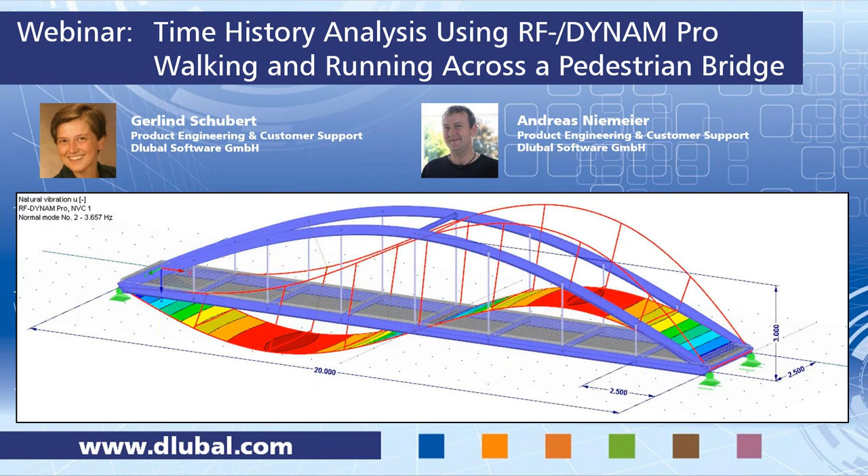This is the model that we look at today. It's an arch bridge, and the persons we simulate are walking in the center along the bridge. So we simulate an excitation which is changing in time, but also changing in position. That's the important bit today.

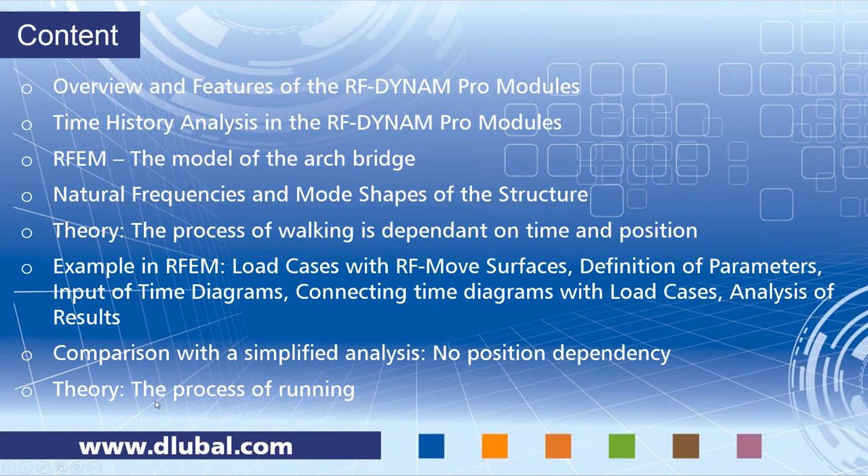Last, I will explain the theory of running. So I will show you all the formulas you need to simulate running, but we don't do this as an example again in RFEM because the input would be very similar. That's why I just show you the formulas and how you can do this. So this is the content, now you know what to expect, and we start with the overview of the modules.

So we have 3 dynamic modules in RFEM. This is the same in RStab. So we have 2 program families, RFEM and RStab. Dynamic modules exist in both, and they are very similar in both. In RStab, you can only consider members, and in RFEM, you can also consider surfaces and solids. So this is the main difference between them, but the dynamics modules themselves are very similar.

So we have the module RF-Dynam Pro Natural Vibrations.

Which you can use to analyze frequencies and mode shapes for member surfaces and solid models. You can directly import the masses from load cases, and you can combine these mass cases in mass combinations.

You can also import stiffness modifications, for example to consider the pre-stress of cables, or you can deactivate some members. You could consider the stiffness from RF concrete, and so on. So this is considered as initial conditions.

So the whole dynamic module at the moment is based on linear calculations. We have obviously several eigenvalue solvers available and everything you kind of expect from a modal analysis, so you get modal masses, effective modal masses, and modal mass factors, and so on.

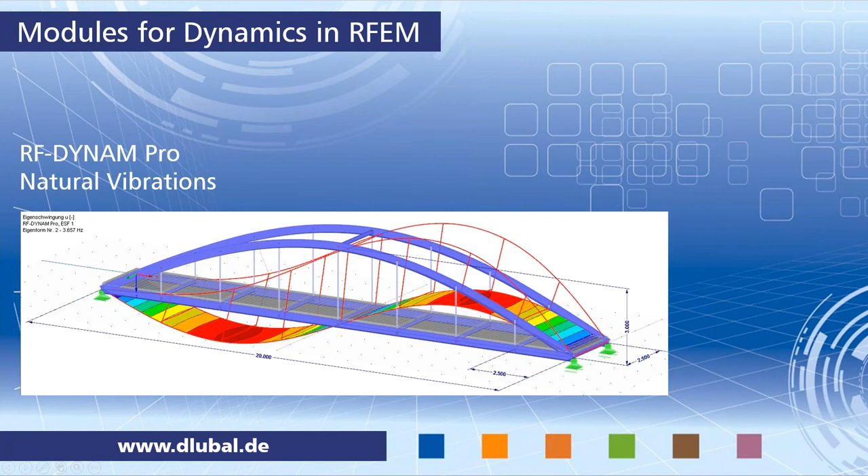Then we have the module RF-Dynam Pro forced vibrations, which is based on the natural vibrations, so you obviously need the natural vibrations as a basis. This module, forced vibrations, contains both the time history analysis, that's what we want to look at today, and the multimodal and multi-point response spectra analysis.

So today we consider only the time history analysis, and I'm also concentrating here on the introduction only on this one. The response spectra analysis is to perform an earthquake analysis.

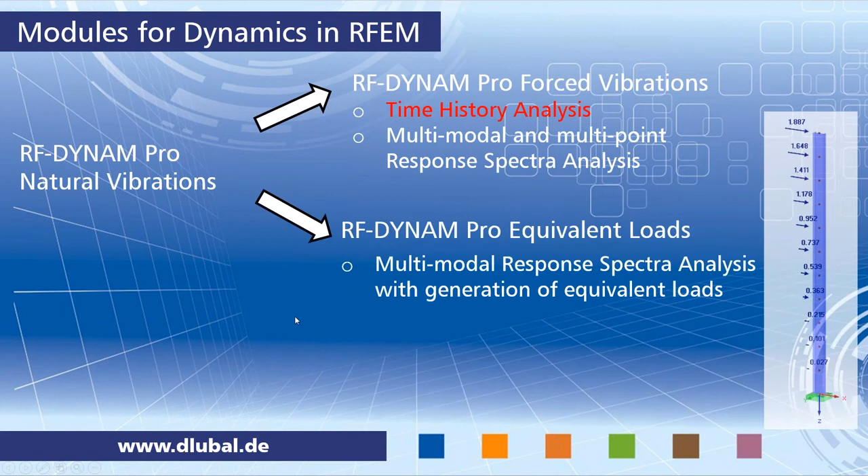And then we have the module RF-Dynam Pro equivalent loads. This contains a multimodal response spectra analysis, so it's again the same, but here you get equivalent loads calculated and exported into load cases, which you can use then in RFEM, like in this little example here.

So I don't go into detail on this equivalent load module. There is another webinar available which I did earlier, about a natural vibration analysis and equivalent load analysis of a framework. You can just have a look on our website and see previous webinars, download them or watch them directly as a video, as is possible with all of the webinars we did earlier.

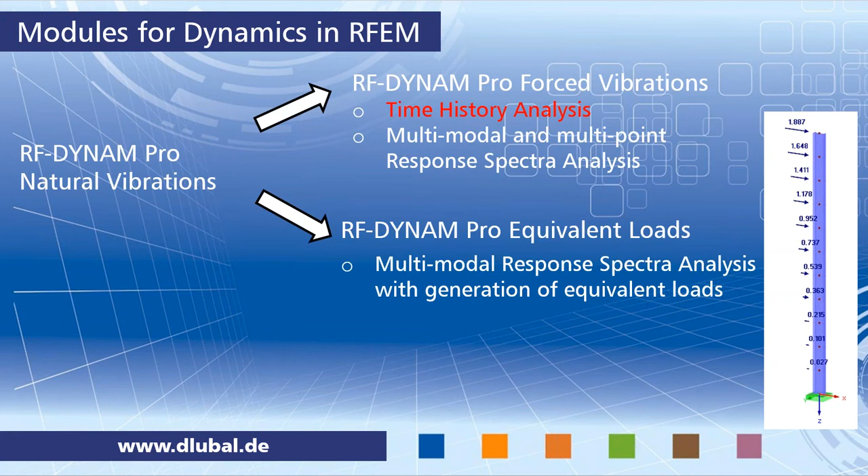So as I said, we will have a detailed look into the forced vibrations, into the time history analysis. So we have the direct integration implemented.

So we use the implicit Newmark solver, and here also you have different Newmark solvers available in the literature. We use the average acceleration method, so you could have a look in the literature for further details. For example, Wilson's Structural Dynamics is just one book I can mention, but there are many good books available about structural dynamics.

Very important for the Newmark solver is to have a small time step. It needs to be small enough to get accurate results. I'll come back to this point later on and give some recommendations for the time step.

We have the structural damping implemented, so you can choose between the Rayleigh coefficients and the Lehr's damping, and you can enter them vice versa. This is converted internally, so you can choose whatever you prefer.

We present the results in a time course monitor and also in result tables. I showed you the time course monitor already, and we will see it also in the example again. You can export results from single time steps, and you can also export result combinations, which is then an envelope over time.

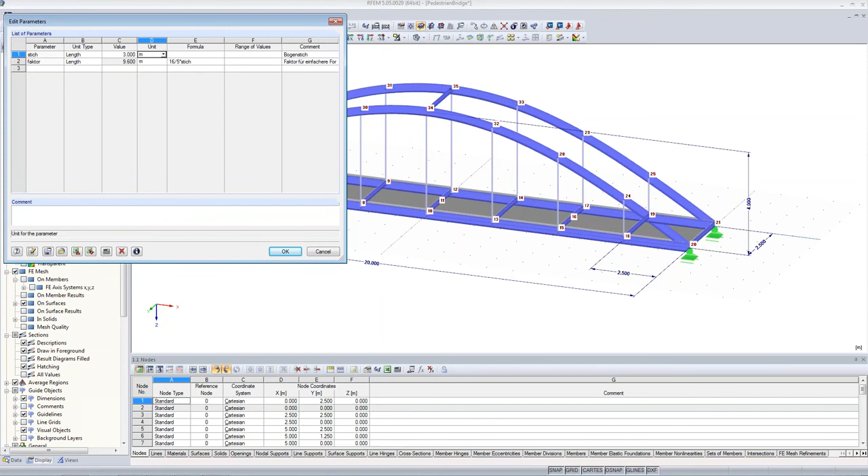I want to undo this, so this is as it was originally. We will use parameters quite often today, and I used them already in the model.

I don't want to go too much in detail here. I defined a thin surface, which is just a thin concrete surface, and this is just a simplified model. Usually you would define an orthotropic surface here, but I need the surface to define my moving loads later on with the add-on module RF Move Surface, and that is why I defined a surface.

There's also a webinar available about how exactly this bridge was modeled and how the parameters were defined, called Parametric Modeling of an Arch Bridge, available on our website. I will show you this at the end of the webinar, how you can access the webinars and download them.

So this is all about the model. We go into RFEM already. Here we go, RF-Dynam Pro, dynamic analysis.

There are several ways to open add-on modules. You can also open them from here, dynamic, and then RF-Dynam Pro. Here you see again the separation into the 3 add-on modules: natural vibration, forced vibrations, and equivalent loads.

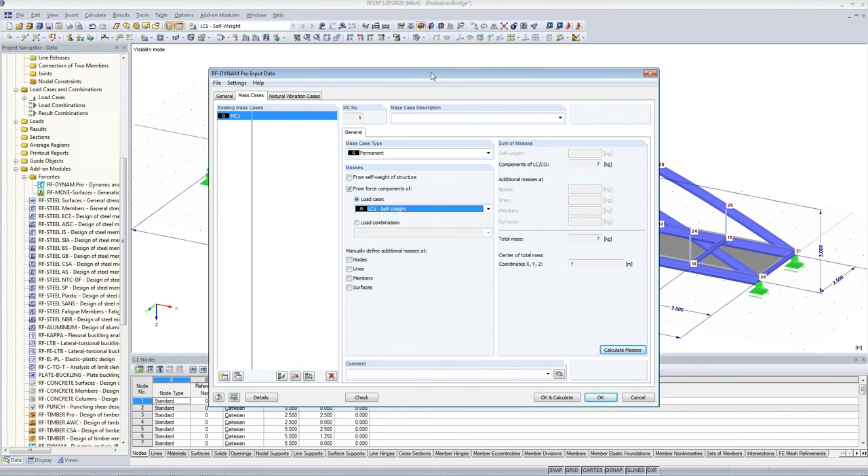This includes the self-weight of the bridge and another 4 kilonewton per square meter for further footway structure that is not modeled itself, that I just apply as a load. So I import here the loads of the self-weight load case. This is important - clear this checkbox here, otherwise you would double the self-weight.

You can calculate the masses internally if you want. If the model is too big, I don't really recommend this, but you can. This is for double checking the masses you actually import here.

You could also define nodal, line, and member masses, surface masses, if you need, so you can define them manually to add, for example, something which is not modeled itself or not included in a load case. You can add this manually here, just as an option. So you have several options already here.

Then we have the natural vibration cases where we import our mass case and where I want to have a look at the first 10 eigenvalues. I apply a diagonal matrix which only considers the masses in translational directions, and I use the Lanczos solver, which is recommendable for this size of structure. It's not too big, so it's a quite quick, fast solver here.

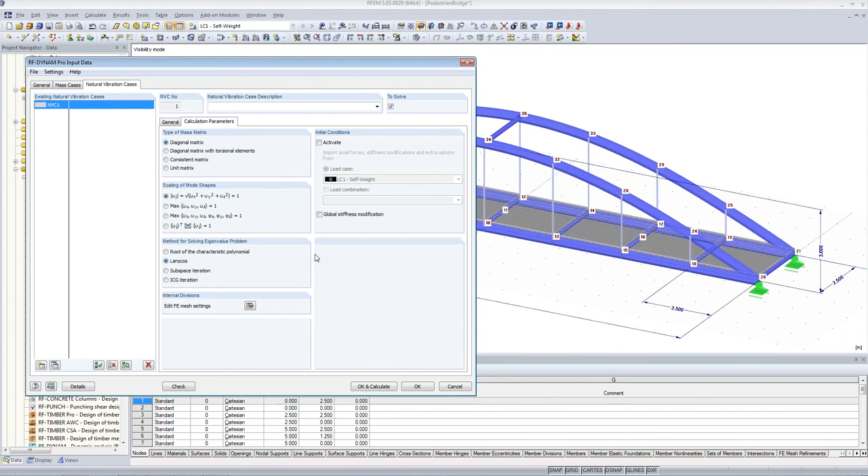Here's the part where you can import the stiffness modifications, as I said in the introduction. But I go more into detail on these natural vibration cases in the other webinar I mentioned already, and I'll show you at the end that you can find it and watch it afterwards.

So here we go, I just want to calculate the natural frequencies first of all.

So we have the dynamic results available in the main program RFEM. You reach them with this button, table 5, dynamic analysis, and you have several drop downs here. At the moment, we have just one natural vibration case, so that's why the drop down doesn't contain anything else - we will see this increasing later on.

We can select the mode shapes in this drop down, or we can just go through the table and look at the mode shapes in the graphic. This is updating automatically. So let's have a look at the first one - this is just the arc going to the side.

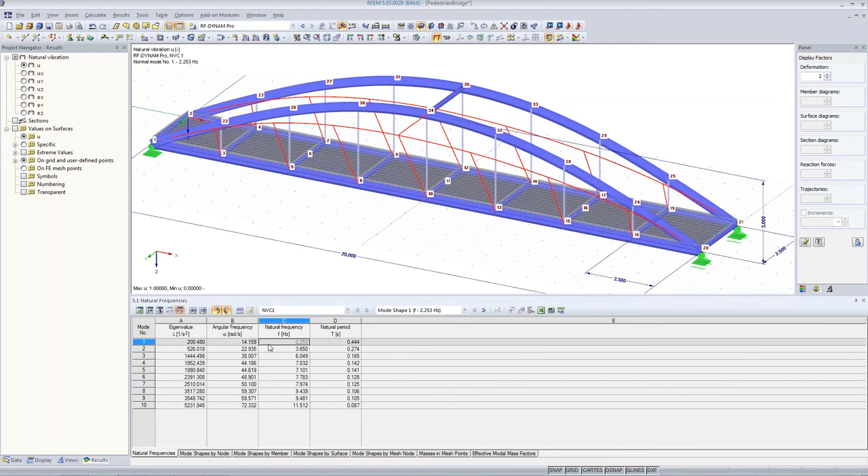And this one is relevant for us - this is the second mode shape with 3.65 Hertz. This is the most relevant shape for us today, because this is the shape of the footway.

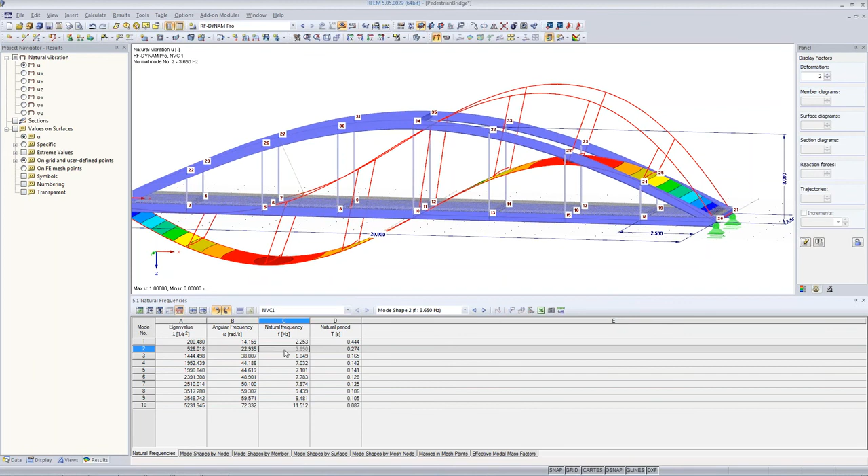What we learn also from this mode shape is that our critical load points are in the quarter points of the bridge, not in the middle. And the frequency 3.65 Hertz is below 5 Hertz, which means we have to consider the dynamics and study this. As you all know, pedestrians are walking with approximately 2.5 Hertz, so this is relevant today.

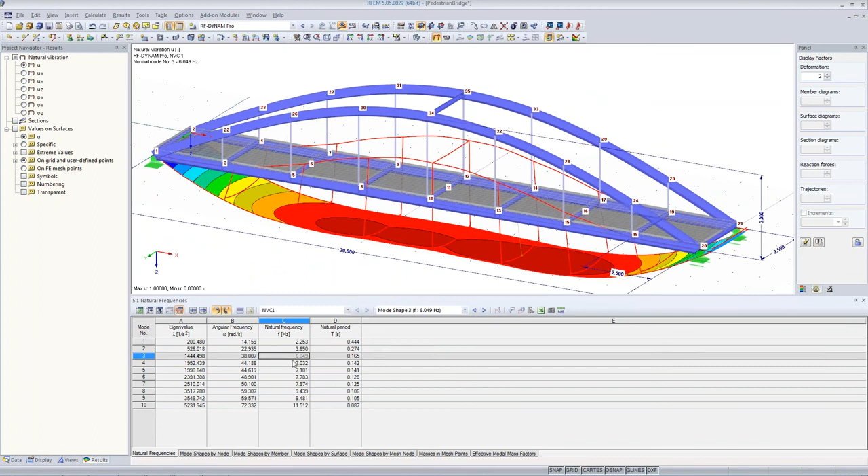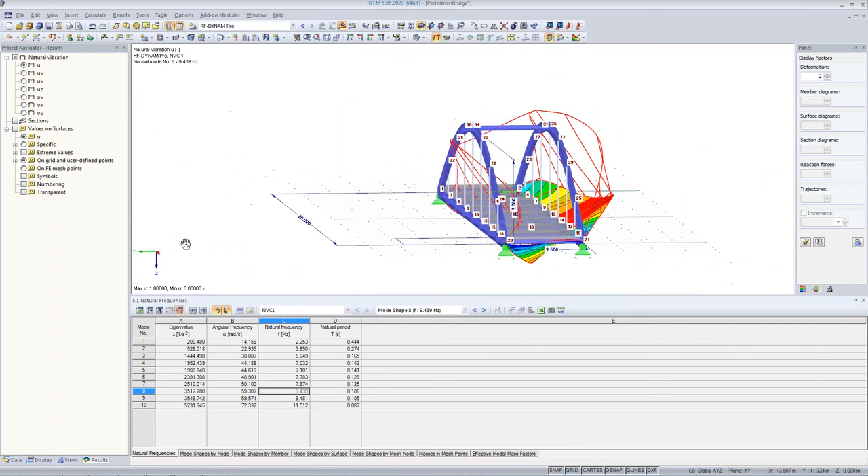We can have a look at the other mode shapes just to complete this. Here the footway is going down, here we have a crossing arc, and here the whole footway is twisting. This is the second mode shape of the arc, and the third mode shape of the footway, drifting away completely here. And this one, the last one I want to show you, is this one. Quite interesting mode shapes, but for us the most important mode shape is this one.

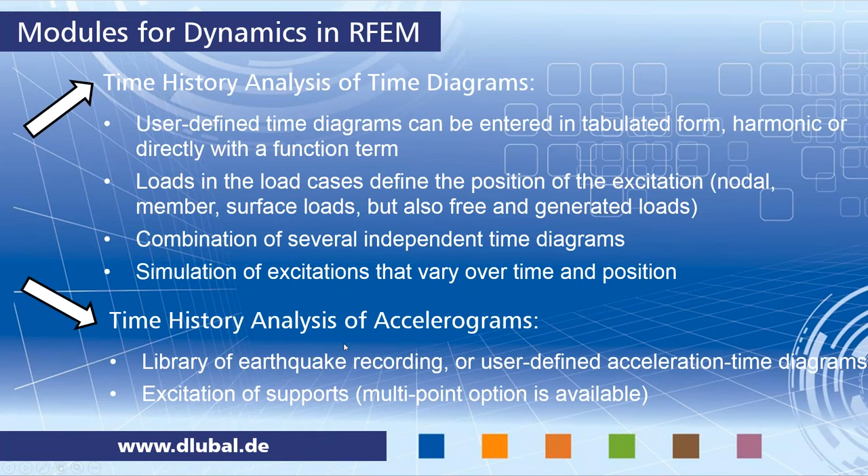So we go back to the presentation, and I want to come to the details of walking. I start with the vertical excitation, and this is the only one we want to model in our example today, because the horizontal excitation is very similar, and you will see how much effort it actually is to enter all these functions.

I'll show you this formula again when we enter it into RFEM so that you can really follow it. A walking person usually walks with a step frequency between 1.7 and 2.3 Hertz, and with step lengths of 60 centimeters to 1 meter. So this is usually the case, and you have to choose whatever is the worst case for your structure.

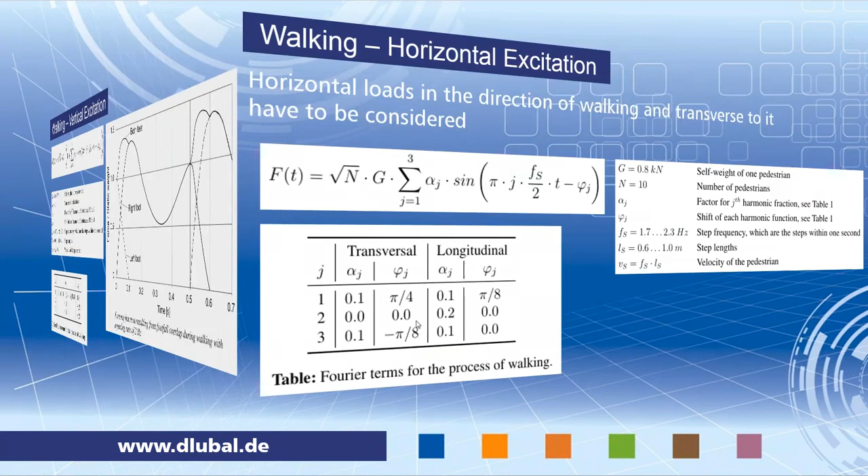The next point is walking. Walking also leads to some horizontal excitation, which comes from the push of the foot in the direction of walking, and from the movement of the upper part of the body transverse to the direction of walking. This is much smaller than the vertical load, and it only considers half of the step frequency, because this is only happening either in the left or the right direction.

So I just want to show you this formula. It's quite similar, a sinus function as well, consisting of 3 Fourier terms, and you have the weight of the pedestrian. This is the number of persons, I'll come back to this later on. We had this in the formula for the vertical excitation as well. I'll explain later how this is calculated, or what kind of assumption you have to make here.

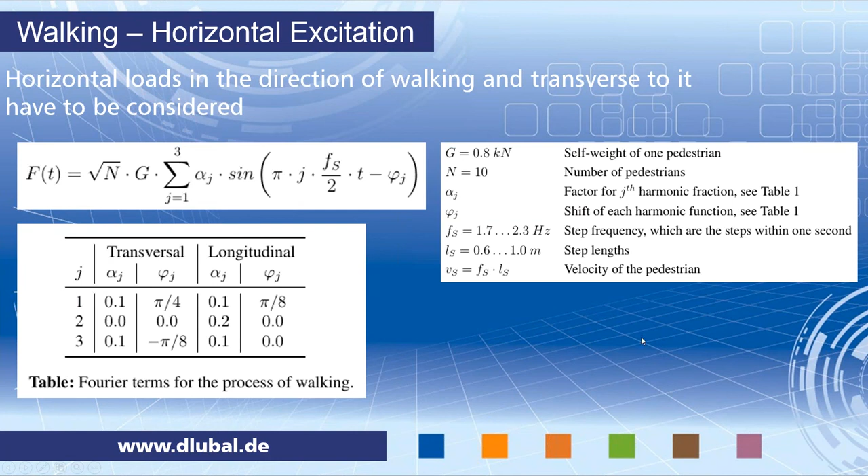We don't consider the horizontal excitation in our example today, but this might be quite important, and you have to consider this if your bridge is quite soft in the horizontal direction. So this might be important, but it's too much for this one hour webinar today, that's why I excluded it from today's example.

As I said, we come back to the number of persons. It's not that multiple persons on a bridge increase the load by the same factor, because these persons are not walking synchronously, they are walking randomly. That's why you don't multiply by 10 just because you have 10 persons on the bridge.

That's why in the formula you have the square root of the number of persons. Then you have to think about how many persons are actually on the bridge. If there are too many persons, you don't consider a dynamic problem anymore. If you think about a stream of pedestrians or a crowd, this is not dynamic - these persons are not walking or running anymore, they are moving slowly, statically.

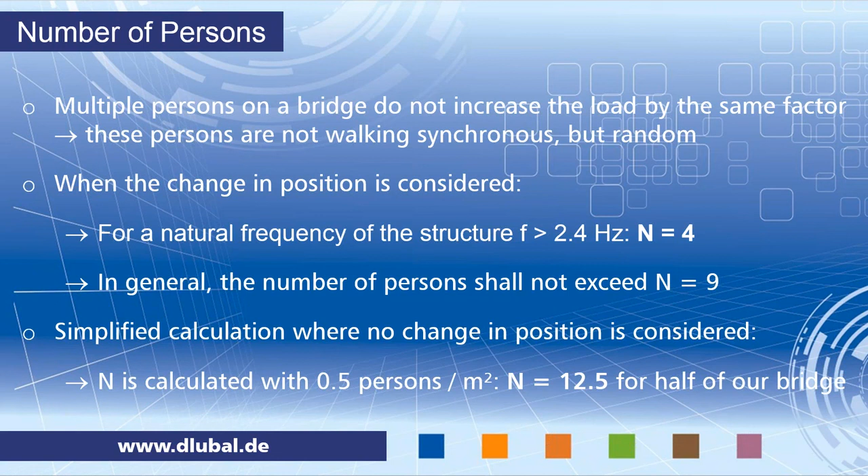We want to consider the dynamic case, and you find several assumptions in different standards. For example, the Eurocode suggests 10 to 15 persons, and it also depends on whether you consider the change in position or not.

So we start today with the detailed implementation. We study the change in position, and the recommendation is: if your natural frequency of the structure is greater than 2.4 hertz, which is the case for us, you have to consider 4 persons walking along the bridge. In general, the number of persons shall not exceed 9.

When you do not consider the change in position, so when you simplify the calculation, you need to consider more persons. You should consider half a person per square meter, which for our whole bridge would mean we have to consider 25 persons.

But that's not realistic in our case, because our relevant mode shape, as we have just seen, is the second mode shape. So our critical load points are the quarter points, and that's why it's more realistic in our case to consider only half of the bridge. So in the case where no change in position is considered, I would assume 12.5 persons being on the bridge.

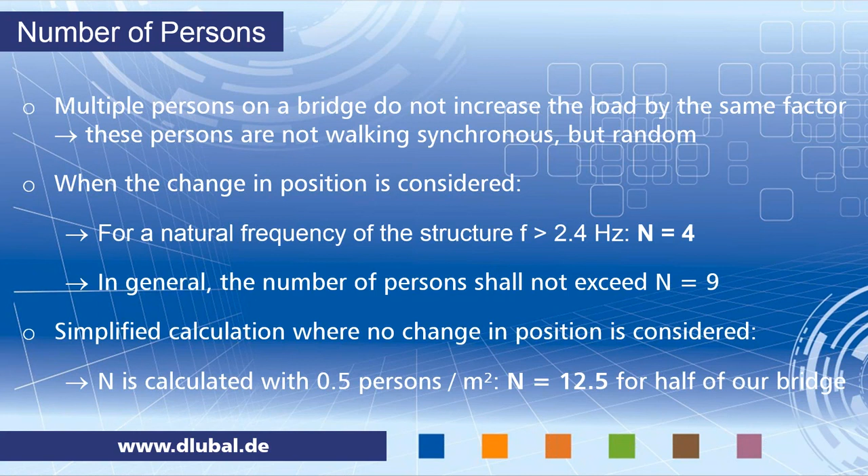Then I already said that the choice of time step is very important. This is a compromise between accuracy of the results versus calculation time - the smaller the time step, the longer it calculates, but the more accurate the results are.

There are some recommendations available: you should choose the largest natural frequency of your system that is relevant for the system response, and apply this formula to get a delta t. In our case, the relevant frequency of our system is 3.6 Hertz, and this formula leads to 0.014 seconds.

The second relevant factor is the largest frequency of the excitation function - not only the structure is important, but also the excitation function. Our excitation function's largest frequency is 6 Hertz, so we end up with 0.0083 seconds, which is already a bit less.

I did a convergence study in advance to this webinar, studying larger and smaller time steps, and I ended up with 0.01 seconds being good enough and leading to accurate results.

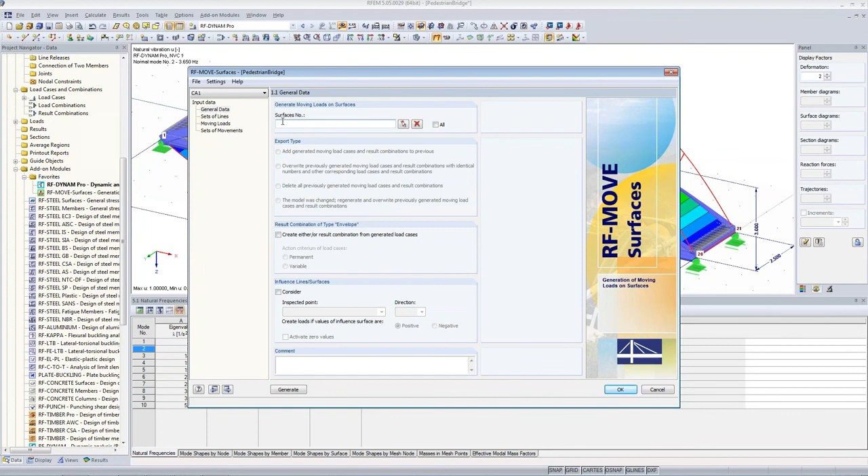Okay, so we want to have loads on all of our surfaces, so I apply the checkbox 'all surfaces' here. And this is all I have to do in the general data.

The sets of lines - we have these pictures here that help us to understand what's going on. So I start with the right foot.

As I said early on, we will have a step length of 62.5 centimeters. This means that the right foot comes to the ground every 1.25 meters - that's the moving step, 1.25 meters. And I apply also an offset at the beginning and at the end.

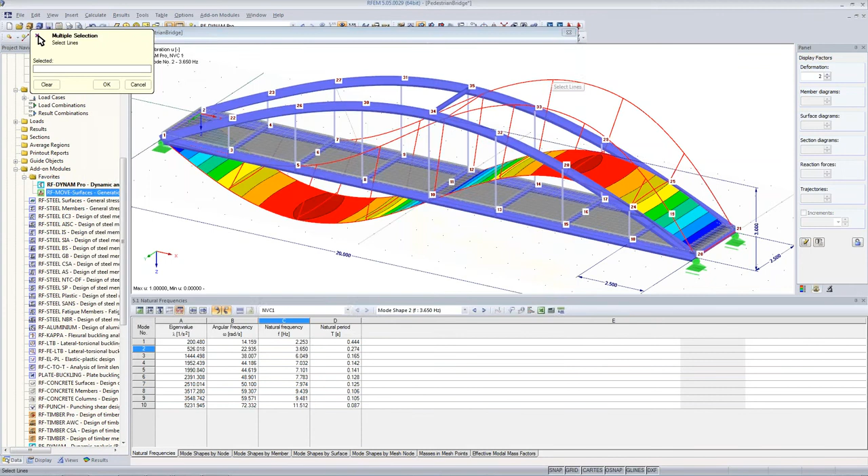Here I have to choose some lines, select those lines, and then define an eccentricity from there, to define how far away from this line my persons are walking. In my case, I want the persons walking in the center of the bridge, and I decided to have the feet 30 centimeters apart from each other.

This is something you could neglect, but I want to study this today. So I say that my right foot is 1.1 meter from these lines we've just selected, and I have to apply a minus here. This is something you have to try, it depends on the direction of your lines. My lines are going away from node 20, so that's why I apply a minus here. So this is the right foot.

I create a new set of lines, which I call left foot, with the same moving step of 1.25 meters. Now I have a larger offset, this is something you have to try out. This is just because my left foot is 1 time less on the bridge than my right foot, well, it's just through the process of walking. So minus 1.4, as I said, 30 centimeters apart.

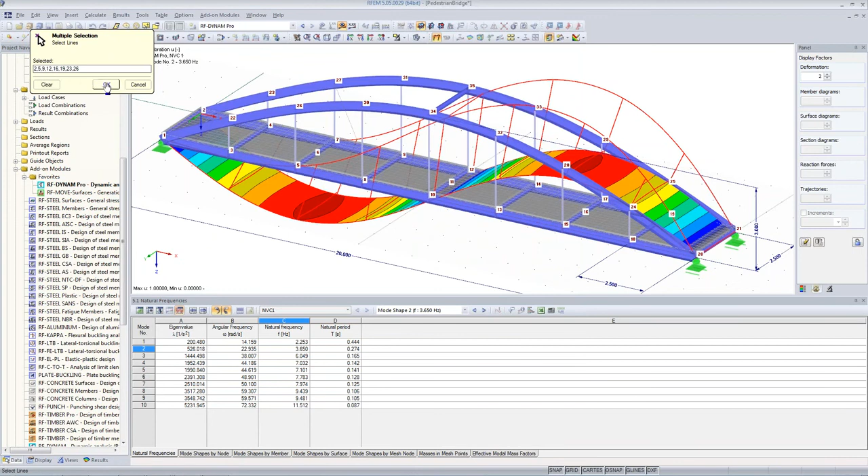So the next one is moving loads. We have both feet, so this is just the load itself we define here, both feet, which is a concentrated force. I want to just define 1 kilonewton here. That is because I want to define all the multipliers and the actual size of my force in the module RF-Dynam Pro, because in RF-Dynam Pro I can use parameters, and this makes it more flexible at the end. So this way I've decided for a 1 kilonewton here, just unity, and I apply all the multipliers later on in RF-Dynam Pro.

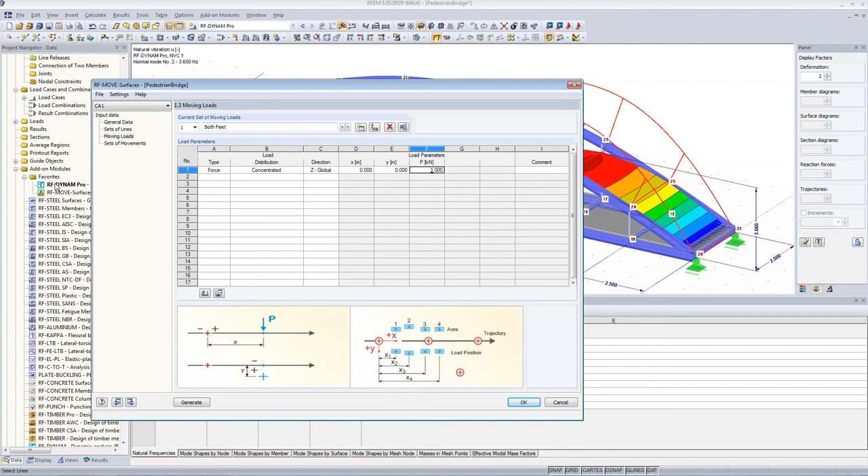So this depends on you. You could also define the weight of the pedestrian here, and then you would not define it in RF-Dynam Pro. It's just a multiplication.

Okay, and then we define a set of movement where we define the right foot. I just choose the right foot and my load we've just defined. I want to have all these created load cases into the earthquake category - not because I'm studying earthquake, just because nothing else really fits. So I've chosen earthquake, and that's okay, so we know where it's coming from. It's a dynamic study we do here.

So I create another set of movement, which is the left foot, and again I choose the left foot, and here both, and that's earthquake. You see now that the current set creates 15 load cases, and altogether we will get 31 load cases. And now I click generate.

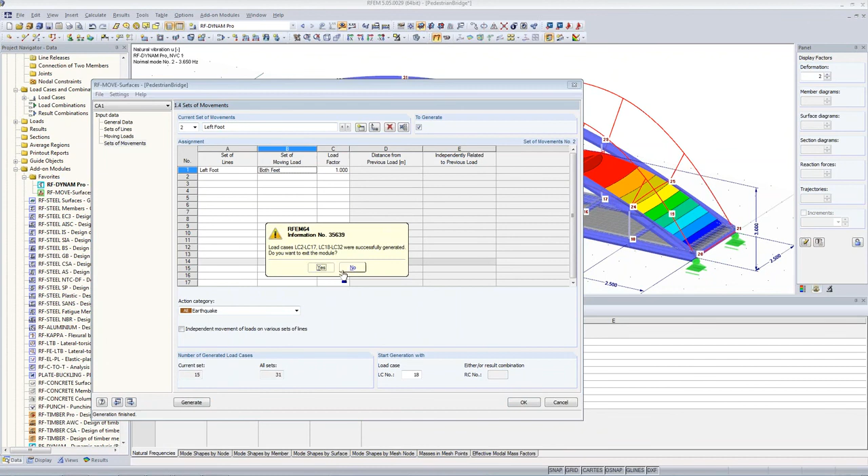And I want to exit the module, yes. And now I can show you what we did. We created all these load cases, and this is what I said, it's just a nice tool to make this a bit faster. So what we created is, when we have a look into Z direction - let me make these tables a bit smaller - and so we see our loads, yeah, here it's the 1 kilonewton.

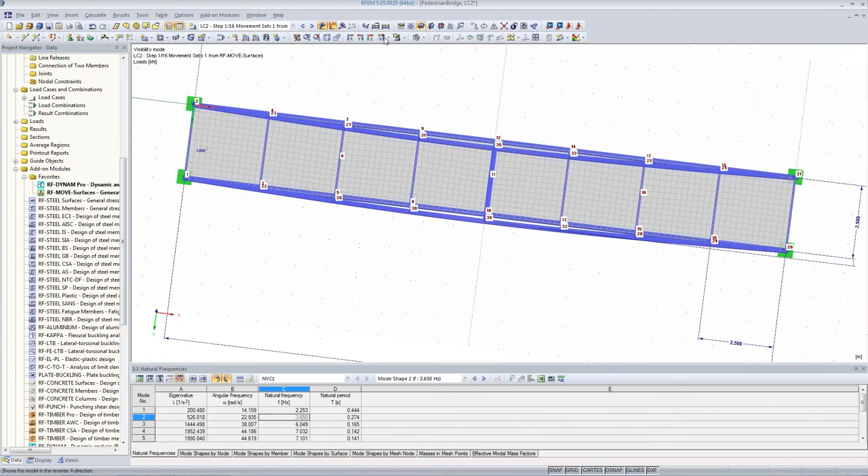So, and now this is the right foot moving along, and after that follows the left foot. We have to connect this then in the right order with our time diagrams. So, okay, that's us done with RF Move Surfaces. Now I want to define a few parameters that we need for the definition of our time diagrams.

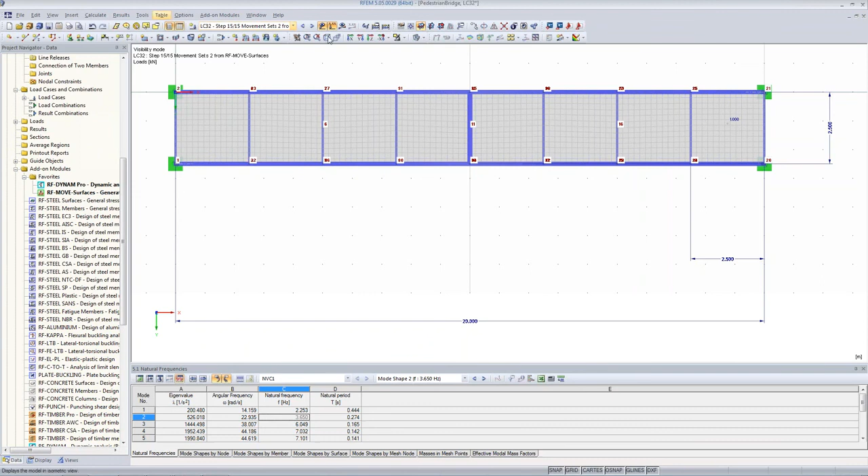So I go again into edit parameters, and I define here the parameter G, which is a force of 0.8 kilonewton - that's the self-weight of the person, which we have seen in the formulas, self-weight of person. And we have N, which are the number of persons, dimensionless. You have quite many different types of unit types available here. I've said earlier that we have to consider 4 persons when we consider the change in position, so we have to apply 4 persons, number of persons.

And then we have the step frequency, which is fs. There's no frequency unit available here, but it doesn't really matter in our case, so I just choose dimensionless, and we start with 2 Hertz. So we study a frequency of 2 Hertz, step frequency.

I just make a note here that this is actually in Hertz, so I don't forget. And this is all the parameters I want to define.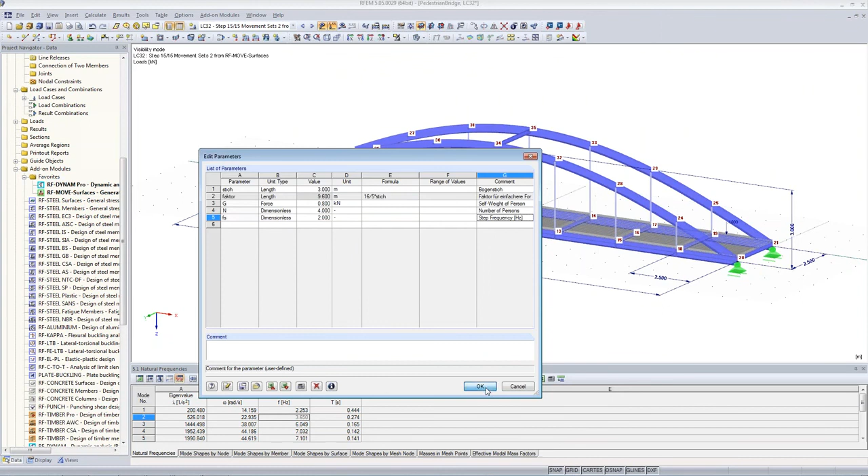Now I can go into RF-Dynam Pro, and we want to study time diagrams. So we activate the forced vibrations module and we activate the time diagrams. And now we have 2 more tabs here, the time diagrams and the dynamic load cases.

I'll show you the time diagrams. I said in the introduction that you can define it in tabulated form, so you can enter whatever you want, or you can import it from Excel. You can also define a function as periodic, where you have to provide the excitation function, the excitation frequency, and the shift. That's what we want to do today.

You can define a function directly here in the edit fields. So when I get started with the right foot in position 1, I have to enter now the formula, and I start with the sinus function itself and then apply all the multipliers. So it was 1 plus the first Fourier term, which starts with 0.4.

Then we have the sinus function multiplied with the sinus function of pi times fs and t. So t is the only parameter that you shouldn't use yourself, because t is used by Dynam Pro as the time. This is kind of a pre-used parameter, so you are not allowed to use it. When you use it, Dynam Pro cannot use it anymore, and then you end up with an error.

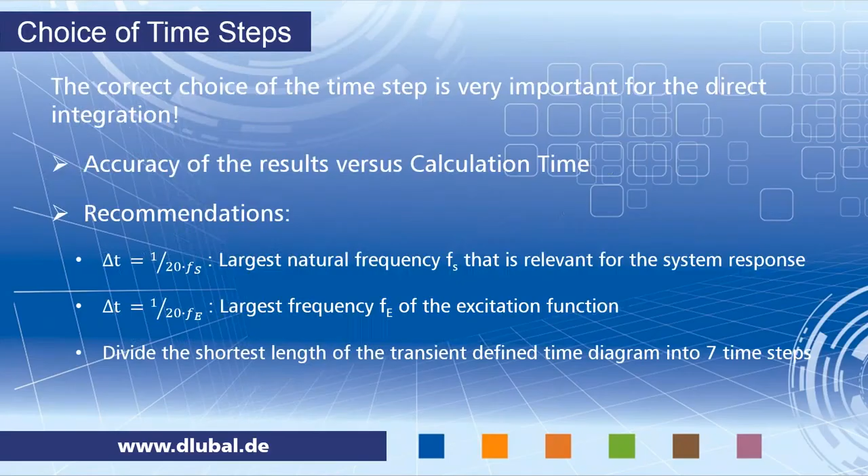So that looks already like what we have seen in the PowerPoint presentation. I go back to this and back to the walking vertical function we just applied. So what I did was the term in brackets: 1 plus, and then I have the 3 Fourier terms, which are the alpha values: 0.4, 0.1, and 0.1.

And then I have the 2 pi multiplied with j - j is just increasing with 1, 2, 3. And then we have the step frequency and the shift down here.

So now what's still missing is the square root over n and the self-weight of one pedestrian. Here we have to be a bit careful because the self-weight of the pedestrian we entered in kilonewton, but internally in RFEM everything is used in Newton.

So I have to divide my G by 1000 to really get my kilonewton. This is a bit tricky, you just have to be careful. So I have defined 0.8 kilonewton in the parameters, but internally now 800 newtons are used.

And then I have the square root over n multiplied, and this is the formula I'm using finally. I'm just looking up to 0.47 seconds - this is what one foot is doing. The right foot in position 1 has the maximum of the heel and the maximum of rolling over the ball.

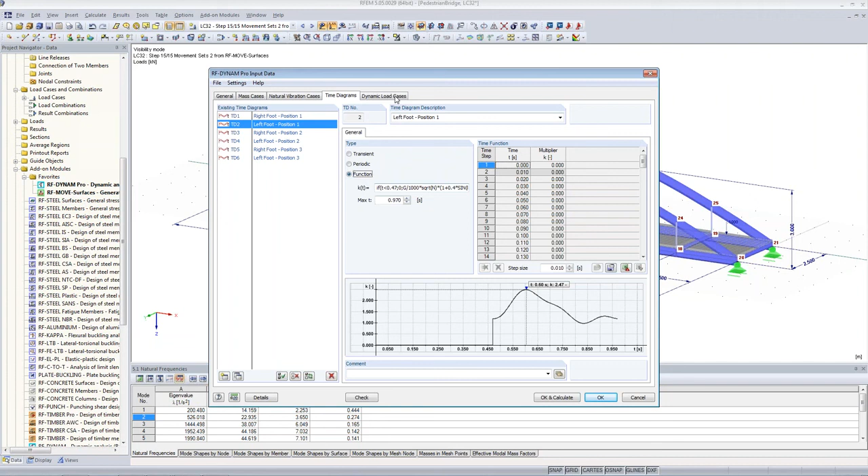So now we go to the dynamic load cases, and I show you what's going on here. Here too, we will start entering everything, and I will then open a ready-made position where I've made all the input. So this is my dynamic load case. This is the walking in vertical direction.

And we will apply the direct integration, which uses the implicit Newmark solver, as I explained in the introduction. Here I will enter the time steps. As I said, I did a convergence study of time steps, and I came up with this. This is leading to very accurate results. This is fine enough; we don't need any finer time steps here. I want to consider this up to 15 seconds, because it takes 15 seconds to walk across the bridge.

I want to export result combinations, and I could also generate load cases for the single time steps - this is here. I don't want to do this today, but this is something you could do. Then I want to consider a damping. This is just a steel structure, so I don't damp it as much. It's a small damping value I enter here.

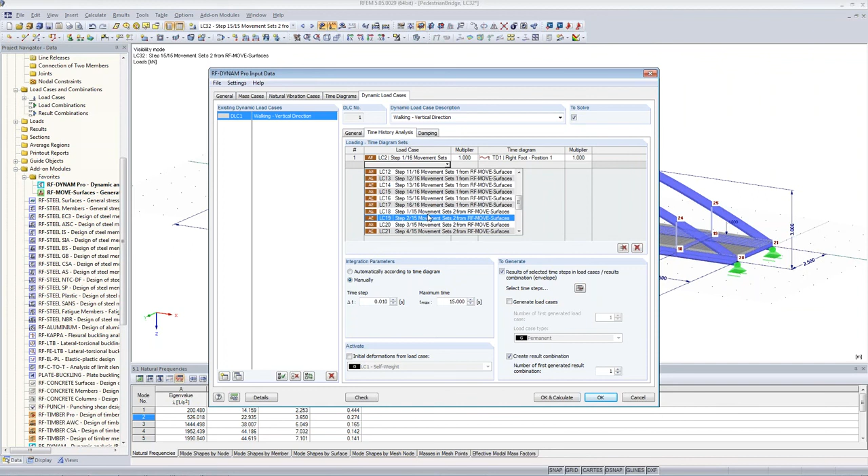And this is now the important bit for us. This is the point, the location where we combine the load cases with the time diagrams we have defined. So I choose the first load case, which is my right foot on position 1, and combine it with time diagram 1. Then step 115 combined with time diagram 2. And time step 2, the load case step 216, the right foot again on position 2 with my time diagram 3, right foot position 2, and so on.

So this is what you have to combine now: 215 TD4, 316 TD5, 315 TD6, and so on. This is something I don't want to finish here in the webinar, because again you would just sit here and watch me doing this for maybe 10 minutes.

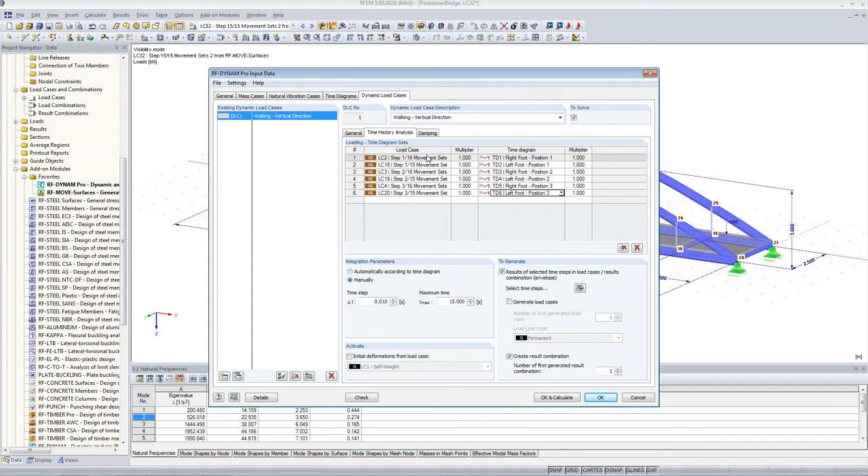So what I do, I just click OK now to close this, and I've opened another position already. Same bridge, same model, everything done as we did so far. And I show you what I did in Dynam Pro. I already entered all these positions, so we can have a look through. We started with this one, and I stopped with you together here, and I did go ahead then. So this is just moving along the time scale.

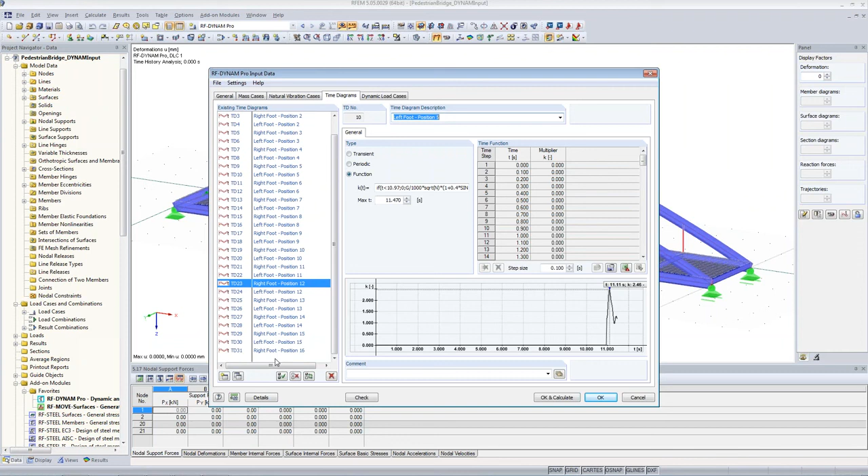And I did already prepare the dynamic load cases, walking, vertical load, where I combined here all the load cases with the time diagrams. The time step, we discussed this. I export result combinations, and I entered the damping here. It's already green - I did the calculation already. It takes maybe 3-4 minutes. We do another calculation today, so you will see how long it actually takes.

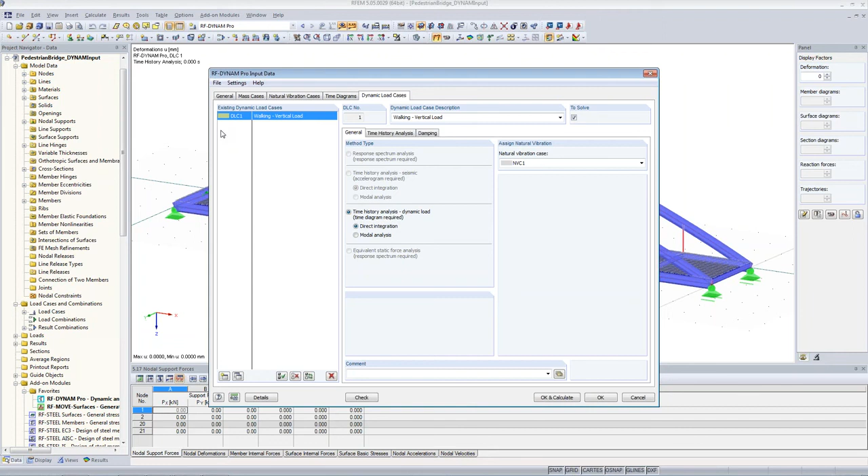The green color here indicates that the results are available. When you right click on this case, you could delete the results, or delete the whole case, or you can clear and select this checkbox to solve. But we keep it as is, it's green, I click OK, and now I want to show you the results.

I show you first of all the result tables down here. So again, here are the dynamic results in table 5, and you have now not only the natural vibration case, we have also the dynamic load case. Because we did the time history analysis, we have all the time steps available, so we could watch the results for each single time step, and we can have a look at the dynamic envelope.

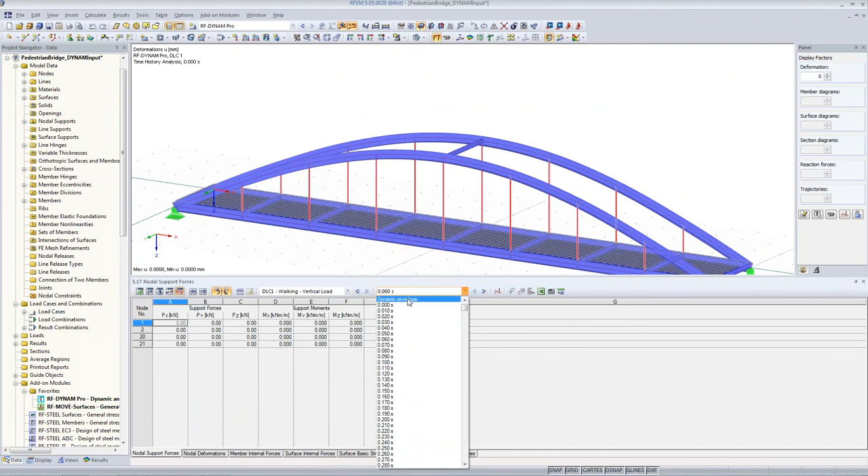So here we go, we look at the deformations at the moment, the deformations U. We get maximum deformations of 0.45 millimeters, which is reasonably small. You have the nodal deformations, member internal forces, nodal accelerations, and nodal velocities.

Important here, we have a direct link from the dynamic tables to the units and decimal places settings, and you come directly into RF-Dynam Pro. Some of the results are linked to RFEM, depending a bit on which table you are in, but you always get directly linked to the correct table here.

Now we are in RF-Dynam Pro results, and we could for example change our accelerations to millimeter per square second, or we have also the imperial units available, which is inch, feet, and yard. We stay with meter per square second because that's quite easy to compare with the acceleration g, the acceleration of gravity.

Here the same, you can change from millimeter, and this is all available. Also here for the masses, you could change it into tons and ounces and so on. You can increase the decimal places. You have the same for the input data, and the same for all the RFEM results in general, including inch, feet, yard.

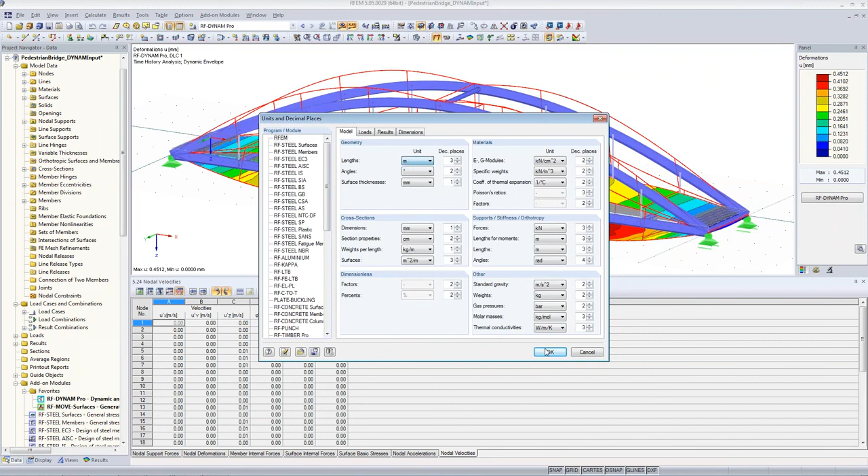A very important tool is the time history, the time course monitor, which you find either here or also in the control panel, time course monitor. So we want to have a look at this.

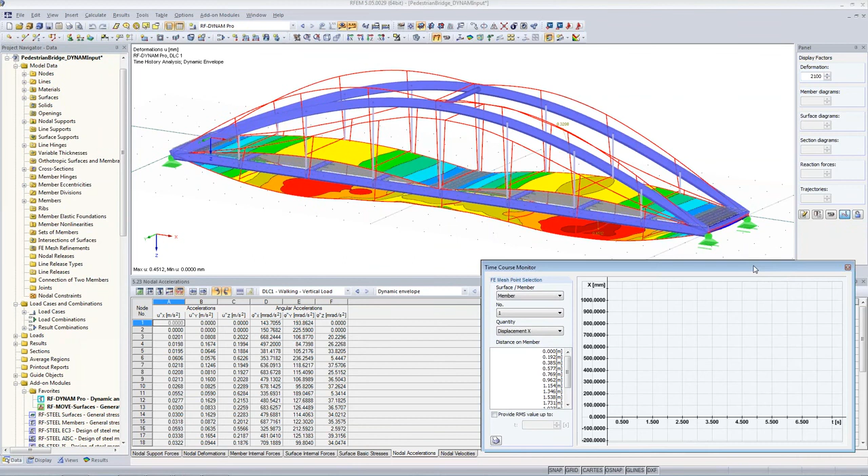I created nodes, so I switch off the results here and switch on the node numbers. I created node 6, which is in the quarter point. I created node 11, which is in the middle. And I created node 16, which is at the 3/4 point. So 6 and 16 are quite likely the nodes where we expect the maximum results, and these are the nodes we will study now.

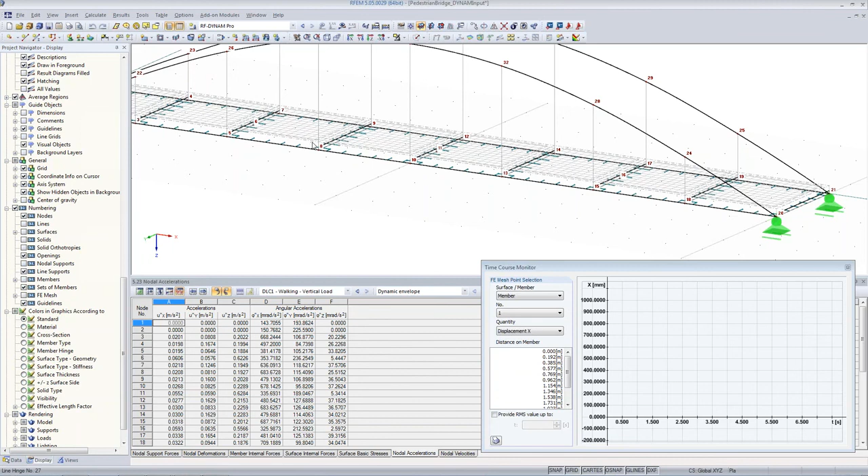These are all interacting, so when I click on node 6, my time course monitor gets ready and loads the data from node 6. I want to see the displacements in the Z direction, so we have maximum deformations of 0.4 at a certain point in time. We can also look at the root mean square value up to 15 seconds, which is often quite useful, especially when we look at the acceleration.

So we will have a look at the accelerations as well, the accelerations in the Z direction. We have quite a few peaks when the person is exactly at this position, walking along node 6, and this is where we see the peaks. But when we look at the root mean square, it's a quite reasonable low acceleration, which is acceptable, and the peaks are still quite low and reasonable.

We can have a look at the other nodes as well. You can use the control key on your keyboard to select more than one node, so I could add node 11 and now you get both on the graph, and I can add node 16 too, so you end up with a timeline graph of all three points. Just to show you this again, the displacement in the Z direction.

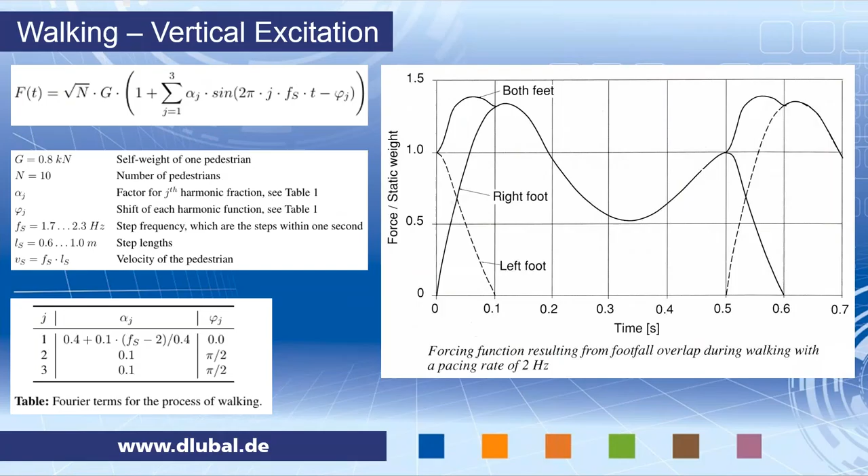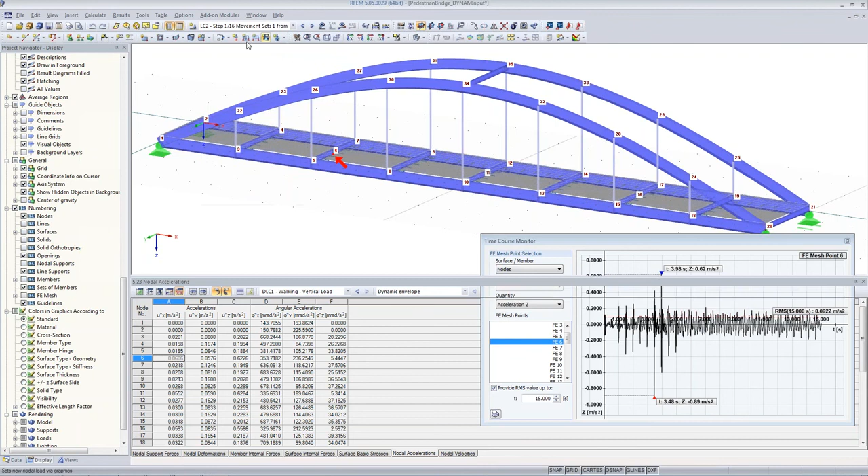So we are now done with the detailed consideration of the walking in vertical direction. We only consider the vertical case, and we did this very exactly. We combined all these load cases with our time diagrams, so we considered the change in position.

Now I want to emphasize again, you can use the parameters that you've entered here. You can change the self-weight of the persons, the number of persons, and also the step frequency, because what you've entered in Dynam Pro is all dependent on these parameters. So you can easily change this and the time diagrams will adjust automatically, you don't have to enter everything in the column again just to study different things. This is quite nice, so I really recommend using parameters.

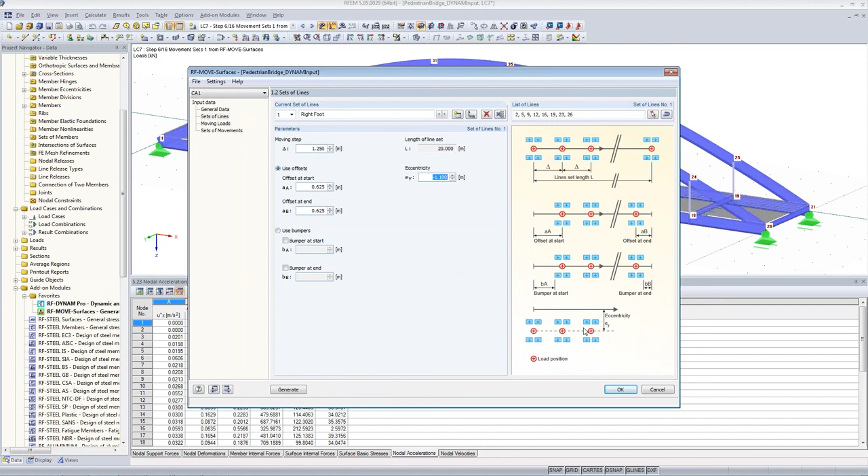Another thing I want to emphasize is that we've defined sets of lines here for the left and right foot, and we've defined the eccentricities, which is the distance between the lines we selected and our walking person. We've defined a walking person in the center of the bridge, but you can easily change this eccentricity and study persons walking on the left or right part of the bridge. You can easily change this, generate new load cases, and if you use the same numbers of load cases they are automatically combined. Then you run the calculation again and study what happens - are the results very similar, or is it worse if the persons are walking on one side of the bridge?

To finish up with this example, I want to compare this detailed consideration with a simplified calculation where we neglect the change in position. This is allowed - it's a simplified assumption. I'll cancel this because I don't want to change anything.

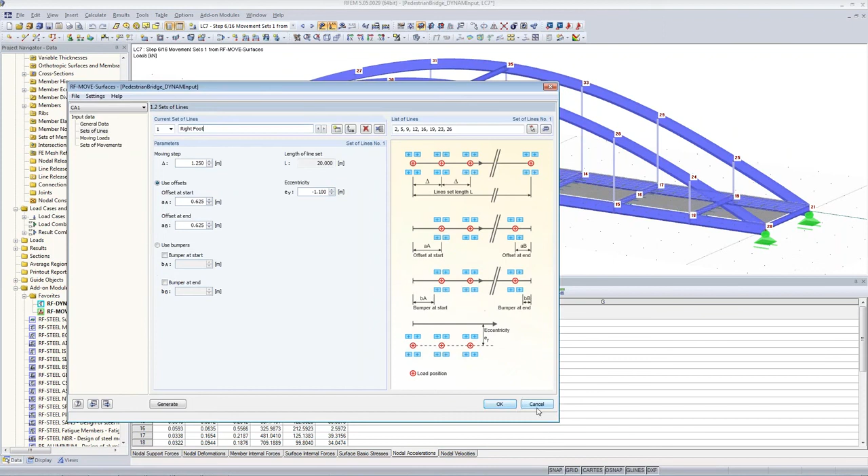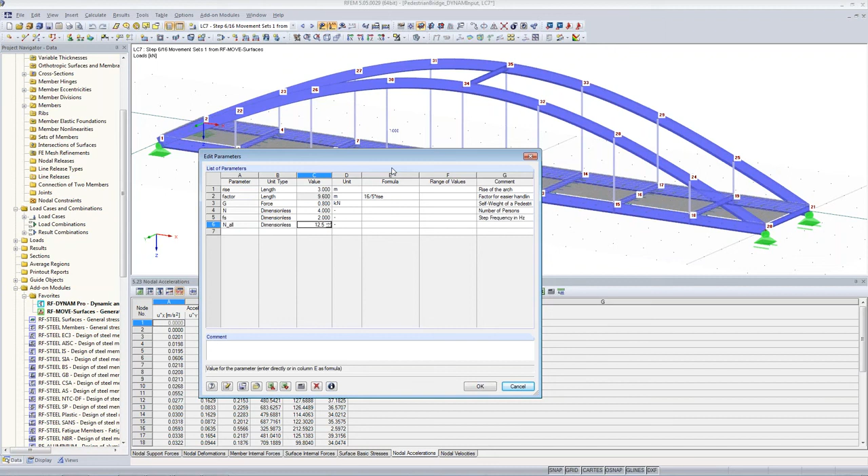We could just study persons kind of going around in circles on one position if you want. You have to increase the number of persons - that's what we discussed earlier. So I will edit parameters and enter a parameter called 'all persons'. I said it's reasonable that we consider only half of the bridge, so 12.5 persons walking randomly along this half of the bridge, as the number of persons.

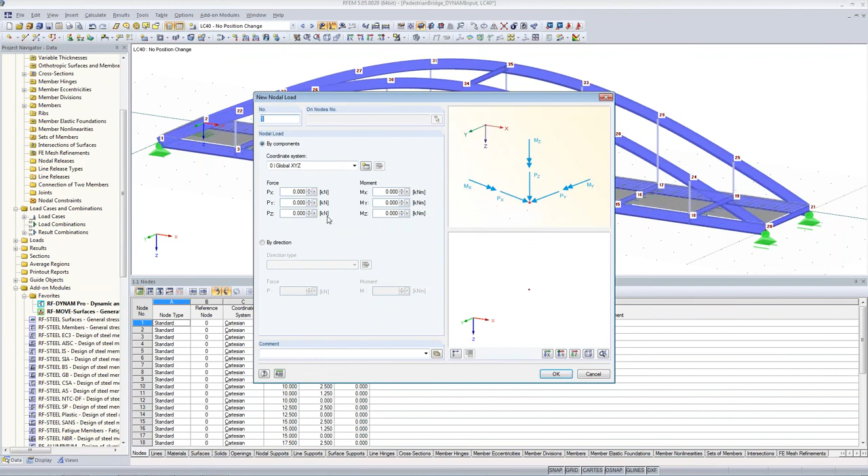We also have to think about our mode shapes - node number 6 is the critical load position. So I will define a new load case, which I can renumber to separate this a bit. I call it load case 40, and I call it 'no position change'. I define a nodal load here, a new nodal load, 1 kilonewton in the Z direction in the global coordinate system, and I apply this on node 6.

This is here. Then I go back into RF-Dynam Pro and define another time diagram. I copy the first time diagram where I did not use the if function, and I call it 'no position change'. I have this function, and all I have to change is the parameter. Now, so far we only considered one period of one foot, but now several persons are going along, so I would at least consider 2 periods here. I would increase the max t to 1 second, or you could even study this a bit longer - but 1 second at least means we have both feet on the ground.

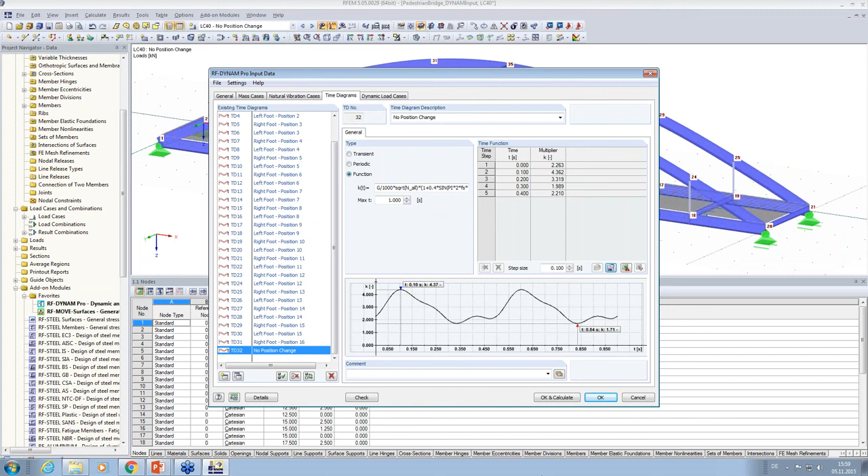Okay, now we go to the dynamic load case and create another load case here. I copy this one - no, hold on, I don't copy this one because I don't want to have this long filled up table. I create a new one and call it 'no position change'.

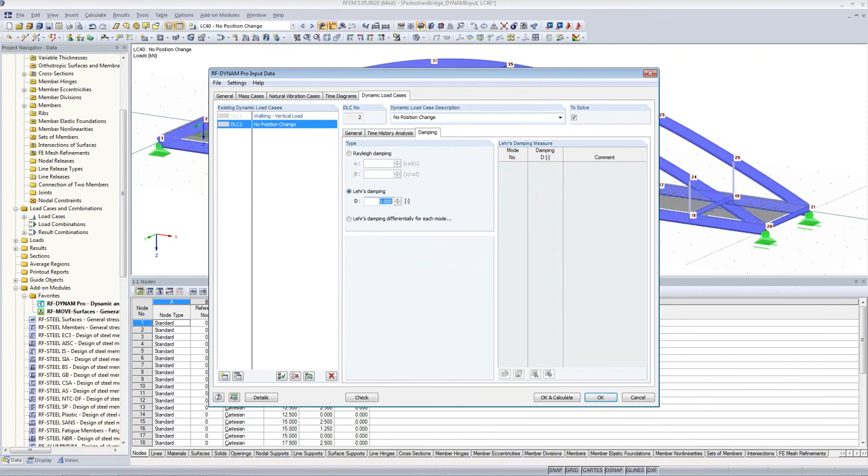I combine the last load case, no position change, with the last time diagram. Again here we only consider this up to 5 seconds, because the time diagram we defined is only up to 1 second, so this should be enough. I create result combinations, enter the damping value, and calculate.

So we are nearly done. I'm a bit sorry, running a bit late. You see the time steps counting up here. So you can imagine, if you choose even smaller time steps, the time history analysis can be quite time consuming.

But it is a very accurate procedure to analyze your structures dynamically. So nearly done.

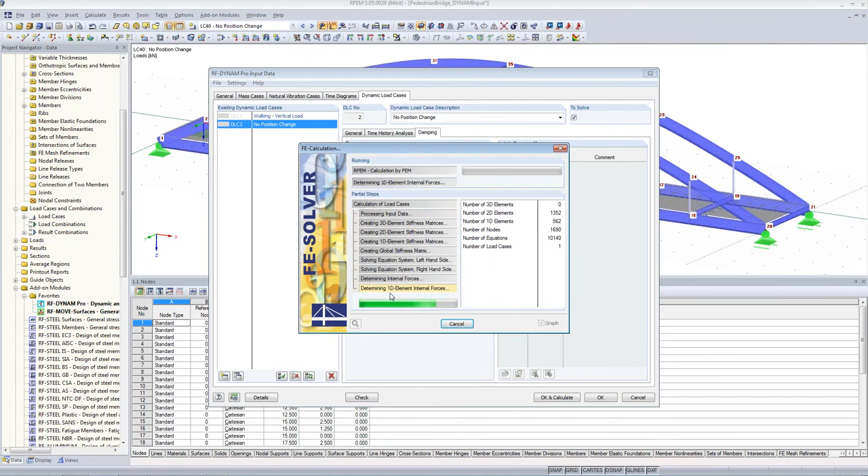We have again a look into the time course monitor, and we will watch node 6. I go to the DLC2 and choose again my node number 6. I have a look to the displacement in Z direction. Here you see already we have a far larger maximum deformation, about 1 millimeter instead of just 0.4.

And the acceleration is the most important. We have peak values of 1.5 meters per square second, so above the limits we are allowed to have.

I can also provide the root mean square up to 1 second, because this is the length of our time diagram. Here also it's far larger. Instead of just 0.09, we have nearly 0.4 meters per square second, which is still below the limits, but quite close.

So this is all I wanted to show you. We are finished now with the example in RFEM. I think this was a quite complex example, and just remember, similar to this, you can do whatever excitations you want. You can simulate explosions, the movement of bells in churches, wind excitations, and so on. So you are quite flexible in load definitions and time diagram definitions.

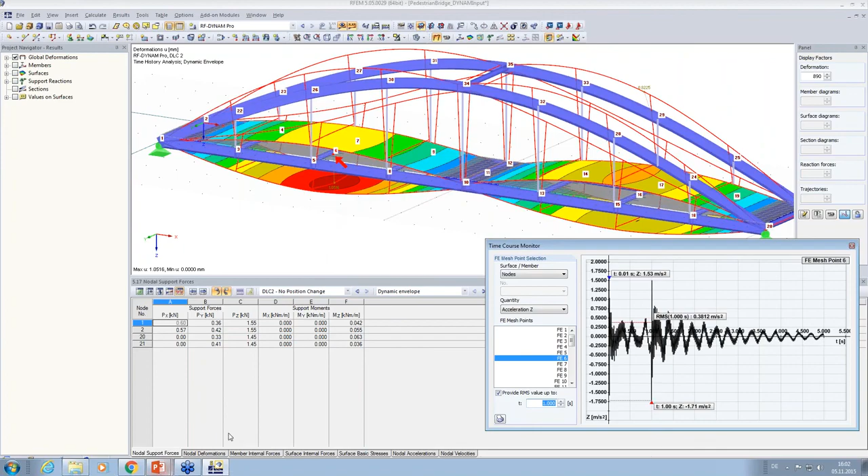So this is all I wanted to show you in RFEM about performing a time history analysis. I hope you enjoyed it and found it useful and interesting.